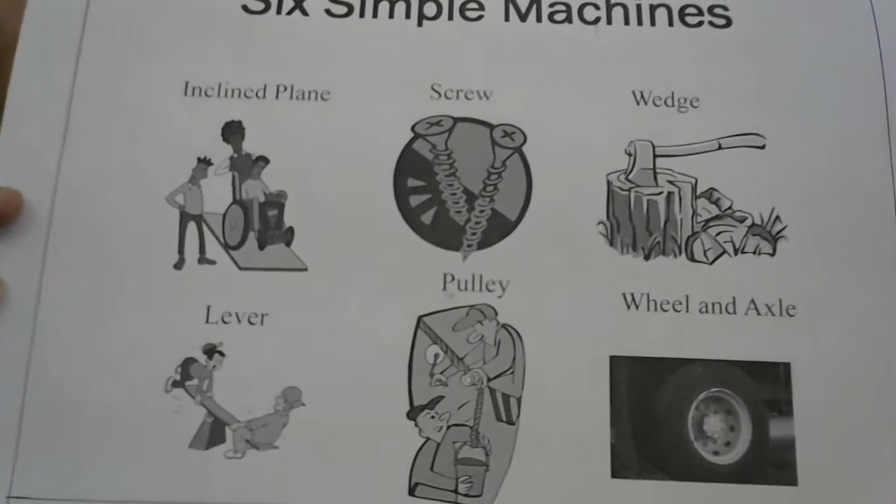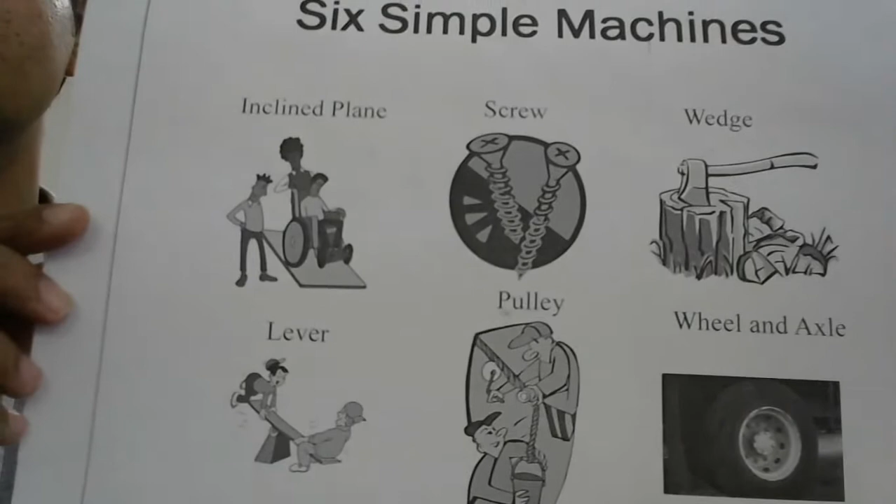Now you can see here, you have studied about the inclined plane, screw, wedge, lever, pulley, and the wheel and axle. These are 6 simple machines used to lift heavy loads with less effort. These 6 simple machines are helpful for getting the work done very fast. So the first one we will study is the screw jack.

We have here a screw jack. You already know when we drive a car and one of the tires gets punctured, we have to replace it. One person can replace the wheel of the car only with the help of a machine, otherwise it is not possible. So this is a screw jack where it can load.

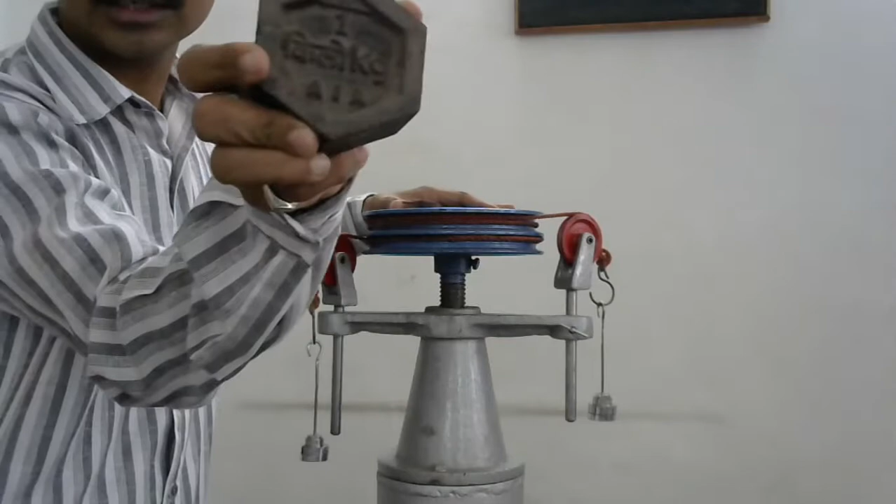We assume that this is a load drum where a heavy load is lifted with less effort. First we will keep 1000 gram as the load on this load drum. Effort I will apply. Now the effort you can see here, it's 50 gram each. 50 plus 50, 100. I added 20 plus 5 gram, so 125 on each side. Another 125 on the other side, and let's check the effort.

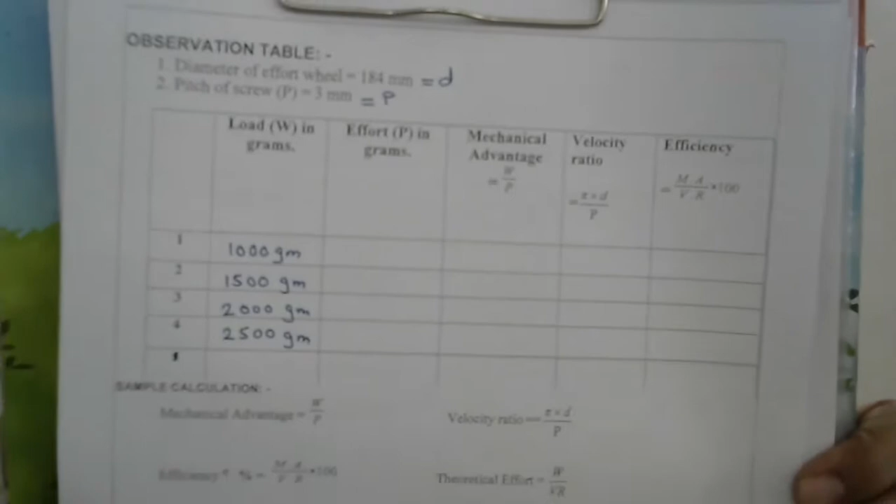125 plus 125 becomes 250, which lifts the load of 1000 gram. Yes, you can see here an effort of 250 gram can be used to lift the load of 1000 gram. Now we'll note it down in the observation table. So this is the observation table. The diameter of this drum is given as 184 millimeter, and the pitch of the screw is around 3 mm. The load I applied first was 1000 gram. The effort in the second column I got 250 gram.

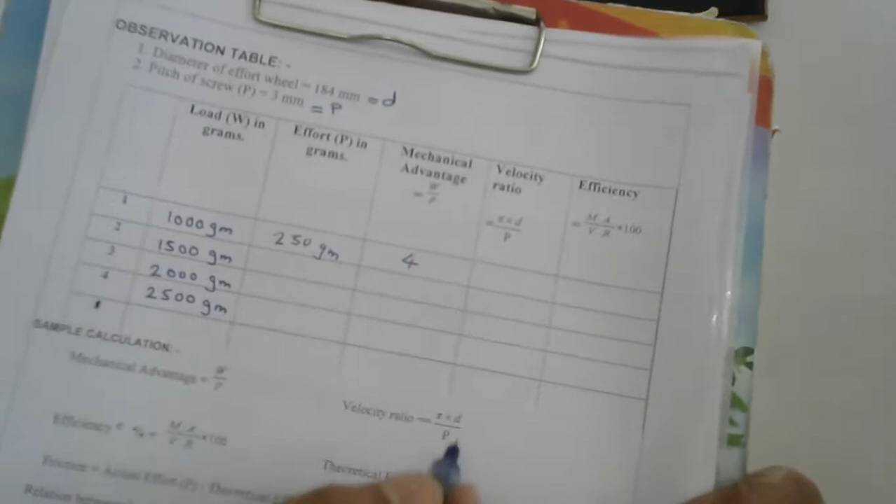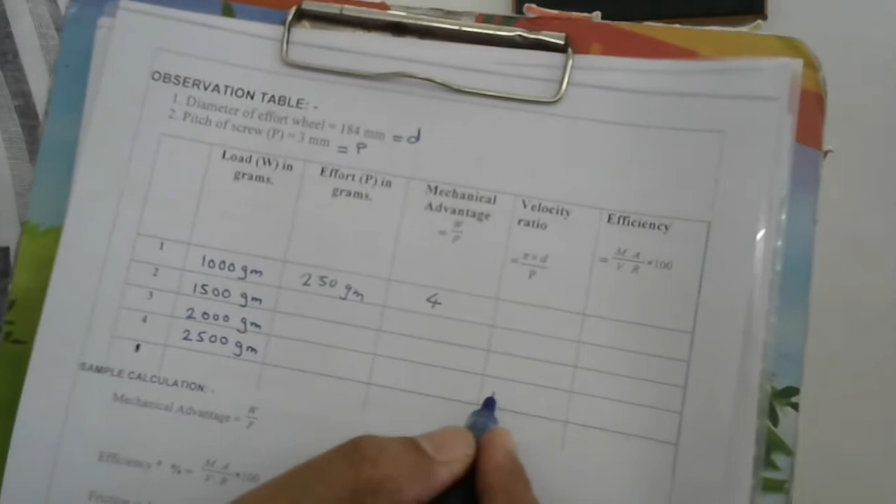Now the mechanical advantage is load upon effort: 1000 upon 250, it becomes 4. Velocity ratio is pi into d, the diameter, divided by the pitch. Here P is the pitch, and we have 3 mm. So the value I am getting here is 192.58. This value is a constant, so you can write it in all these columns.

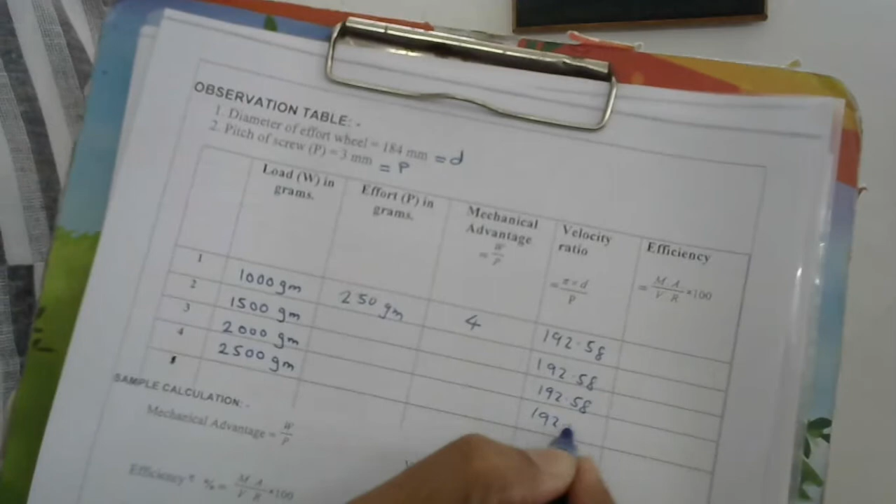Now I will take the weight as 1500 gram and see what effort is applied. So 1500 gram, here I just increase the effort by adding 5 gram more. Okay, now the effort on one side is 50 plus 50, 100, plus 20 plus 10, 130 on each side, so it becomes 260 gram for 1500 grams. See this, 260 gram can lift the load of 1500 gram.

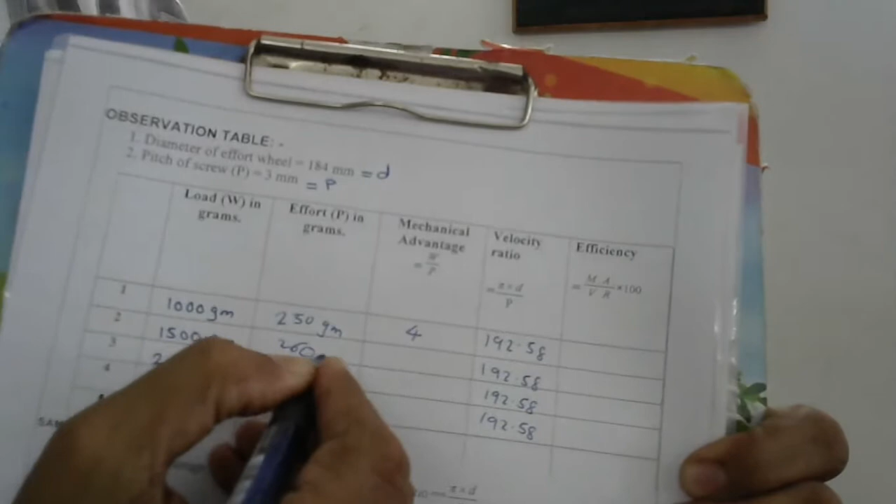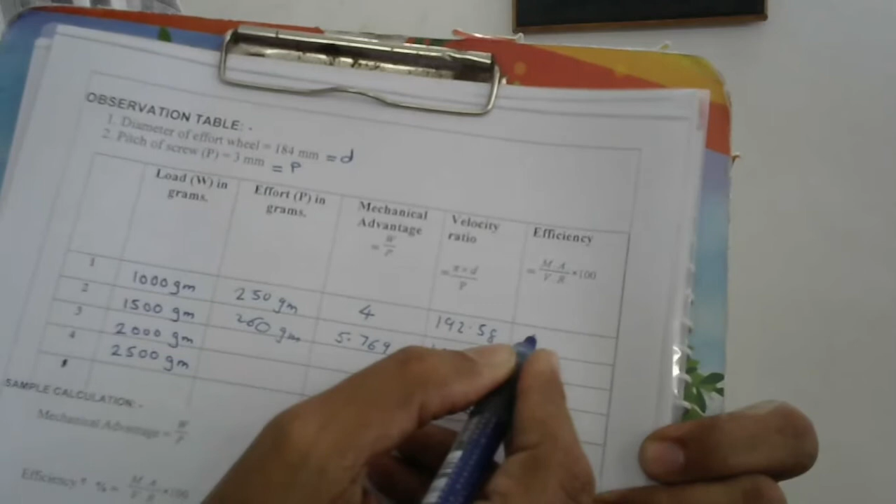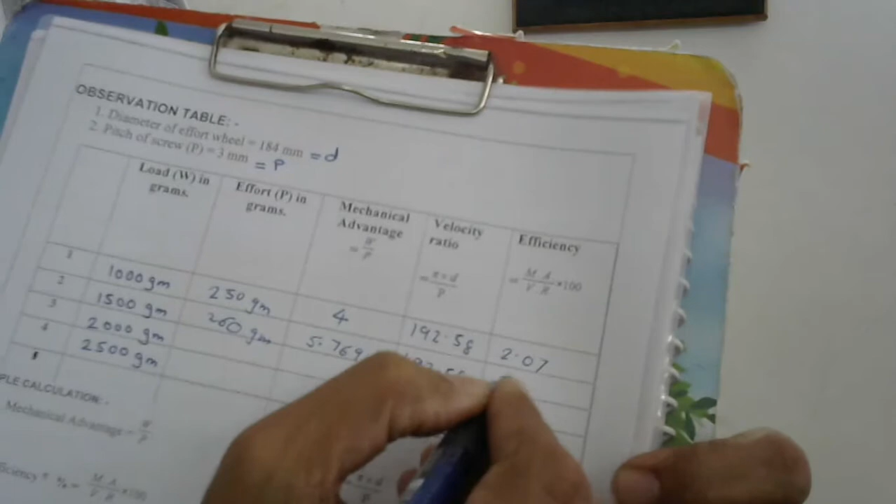So here we can note it down in the observation table again. In the second reading, with 260 gram effort, the mechanical advantage is 5.769, and you can calculate the efficiency. In the first case, efficiency is mechanical advantage divided by velocity ratio into 100, and I got 2.07. Then I got 2.99. Let's take 2000 gram and find out what effort is applied.

So this is the 2000 gram. Now in the effort I'll add 5 gram on both sides and check it. Earlier it was 130 on each side. So here 50 plus 50, 100, plus 20, 120, 130, 135 on each side. So 135 and 135, that becomes 270 for 2000 gram. So the effort applied is 270 gram, and it is sufficient to raise this.

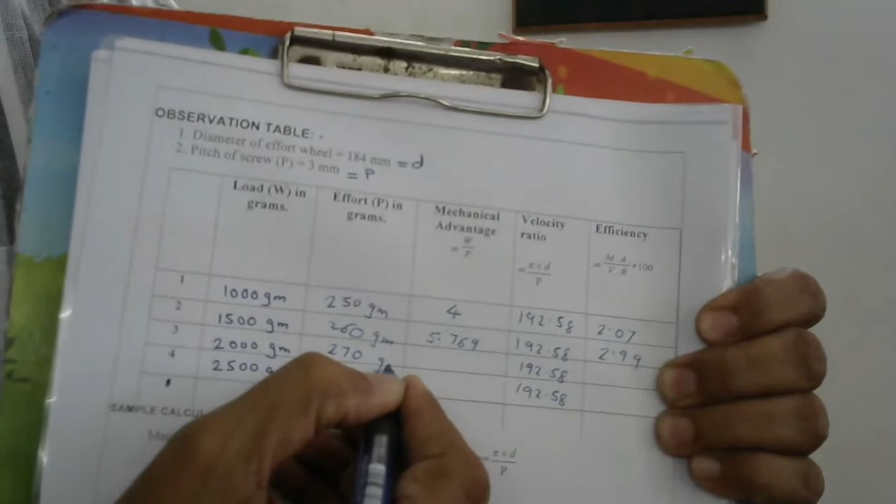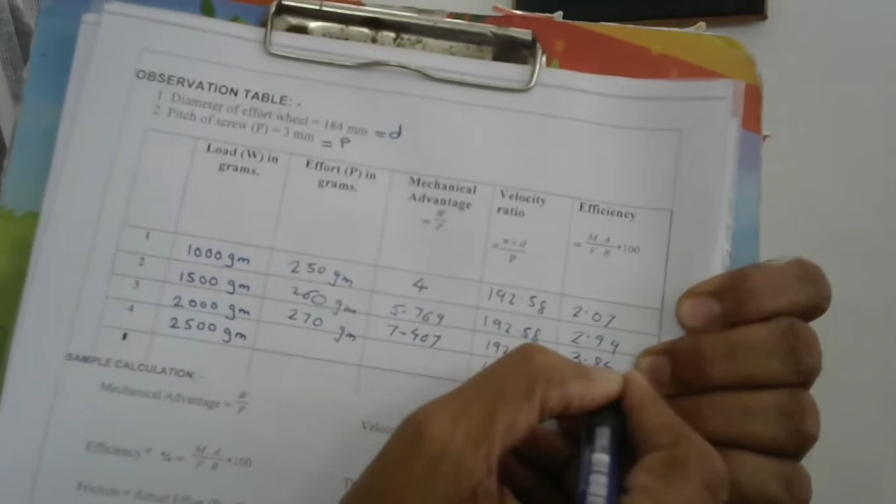Okay, now in the fourth reading we'll add 500 more. So here I got the value. For 2000 I am getting 270 gram as the effort, and 7.407 is the mechanical advantage. Efficiency is 3.84. Now we go to the last value, 2500. Let's check for 2500. I will increase the effort by 5 grams on both sides.

Instead of this, I'll take the... okay, now I applied the effort here. I'll show you: 50, 50, 100, 20 plus 20, it becomes 140 on each side. So 140 plus 140, it becomes 280. Let's check. So here 280 gram is sufficient to lift the load of 2500 gram. See how the effort is less and the load is more, but it can be lifted.

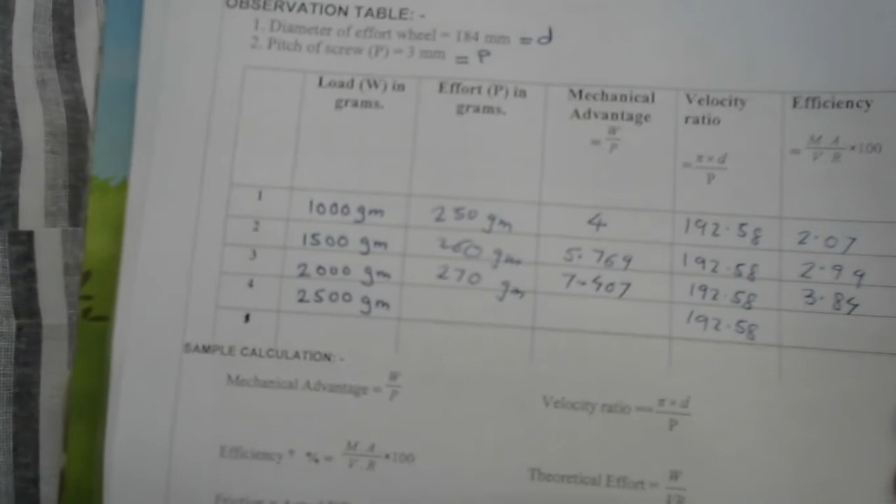So in this way, we have taken the 4 readings. You can take more readings. We'll note down the last observation. 2500 was the load, 280 was the effort applied. I got the mechanical advantage 8.928 and efficiency 4.6. So you can see that the efficiency is less than 50%. That means it is a non-reversible machine.

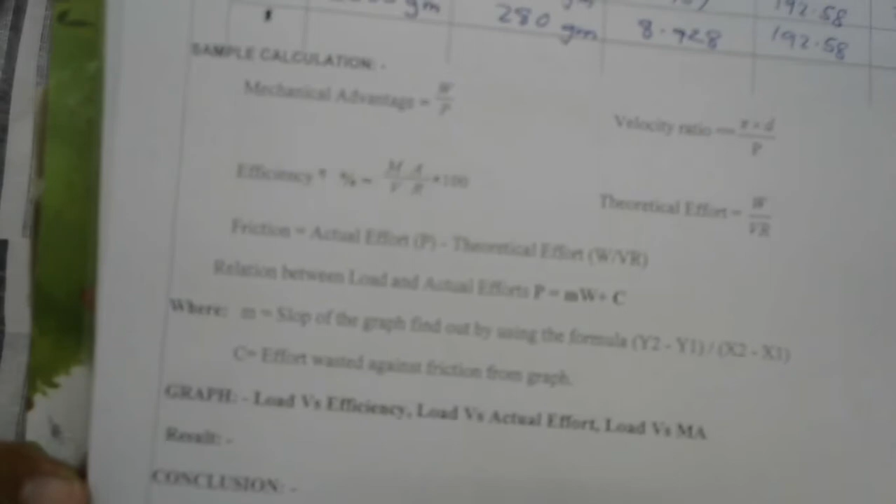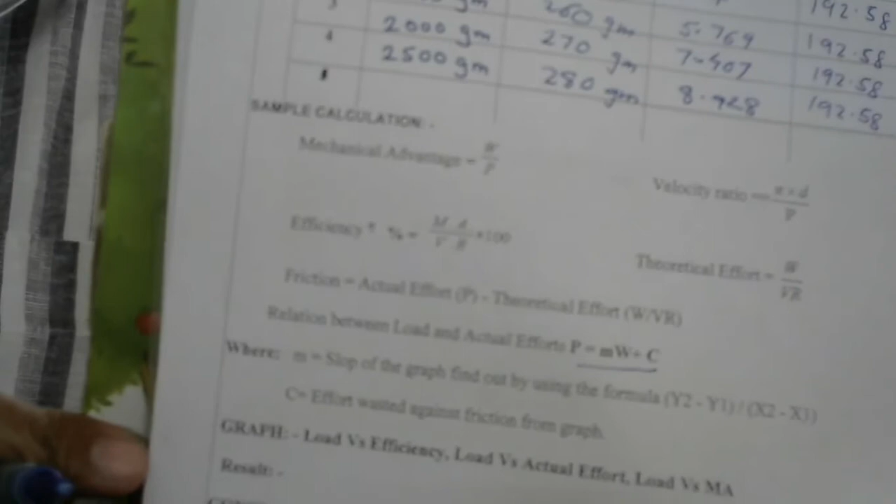The screw jack is a non-reversible machine, and in this way we can find out the mechanical advantage, velocity ratio and efficiency. Now draw the graph of load versus effort, where you are able to prove the law of machine, P equals mW plus c. You will get c at the intercept, and m will be the slope. So in this way we have found the mechanical advantage of a screw jack. I hope you understood this experiment.